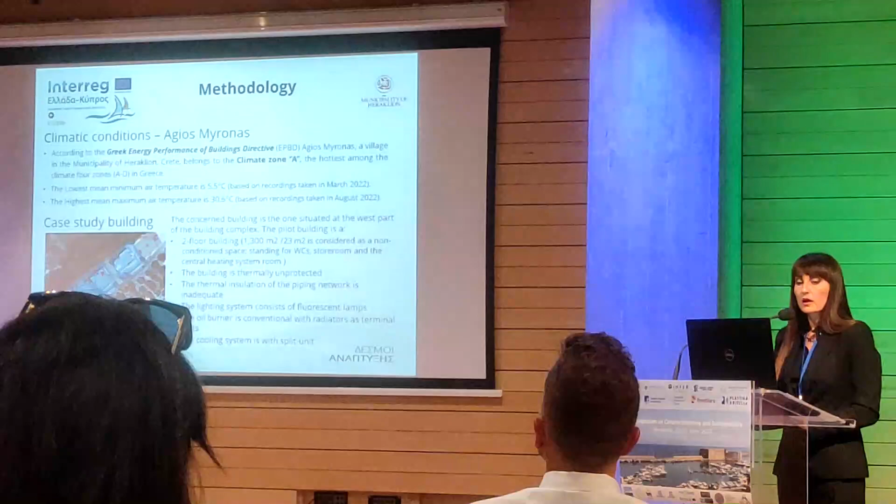According to the Greek Energy Performance of Buildings Directive, EPBD, Agios Myronas, a village in the municipality of Heraklion, Crete, belongs to climate zone A, which is the hottest among the four climate zones A to D in Greece. The lowest minimum air temperature is 5.5 degrees based on recordings in March 2022, and the highest mean maximum air temperature is 30.6 degrees based on recordings taken in August 2022.

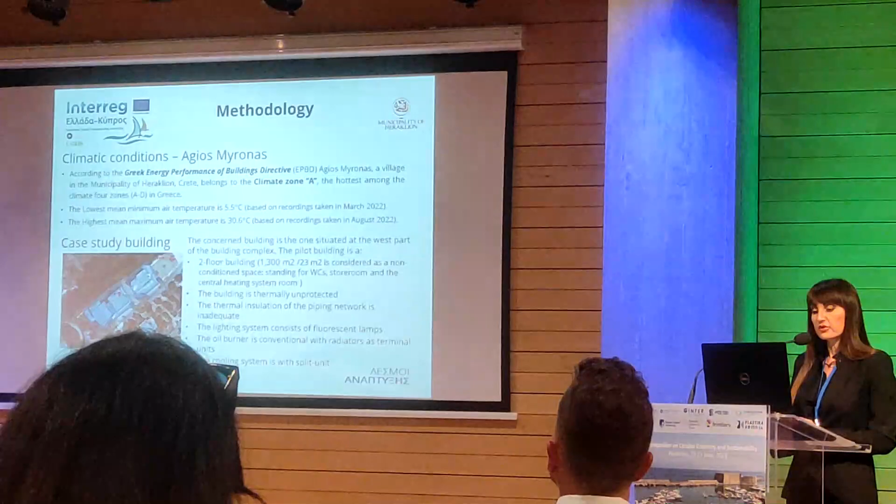The concerned building is the one situated, as you see here in the picture, at the west part of the building complex. The pilot building is a 2-floor building, 1,300 square meters, out of which 23 square meters is considered a non-conditioned space, which stands for washroom, storeroom, and central heating system room. The building is thermally unprotected. The thermal insulation of the piping network is inadequate. The lighting system consists of fluorescent lights. The oil burner is conventional with radiators as terminal units, and the cooling system is with split units.

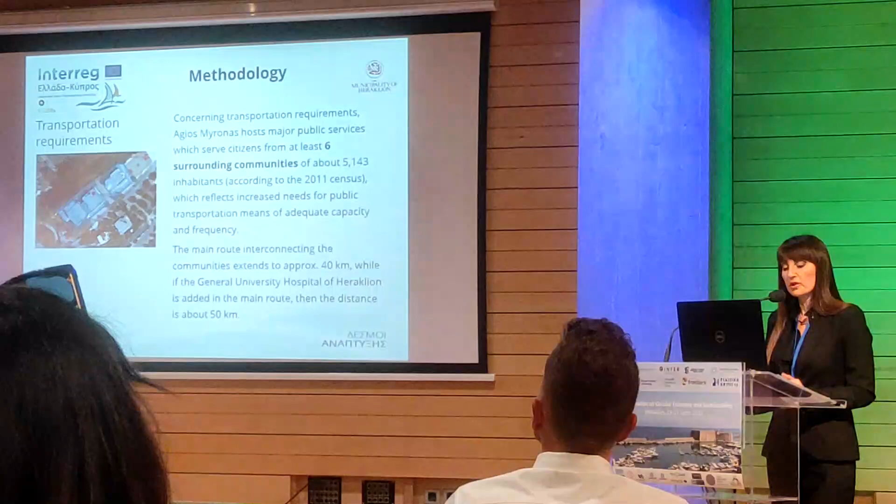Concerning transportation requirements, Agios Myronas hosts major public services which serve citizens from at least 6 surrounding communities of about 5,143 inhabitants, according to the 2011 census, which reflects increased needs for public transportation means of adequate capacity and frequency. The main route interconnecting the communities extends to approximately 40 kilometers. If the General University Hospital of Heraklion is added in the main route, then the distance is about 50 kilometers.

To assess the energy performance of the building, a thorough energy audit was performed, including energy rating using the National EPBD software, technical instructions of the Technical Chamber of Greece, KENAK, which employs the quasi-steady-state monthly time step calculation procedure according to ISO 13790. The building parameters were used as input conditions towards the calculation of energy consumption, and a twin building which meets the minimum energy performance requirements as per the Greek EPBD was used as a reference building to calculate the divergence and see the simulation results.

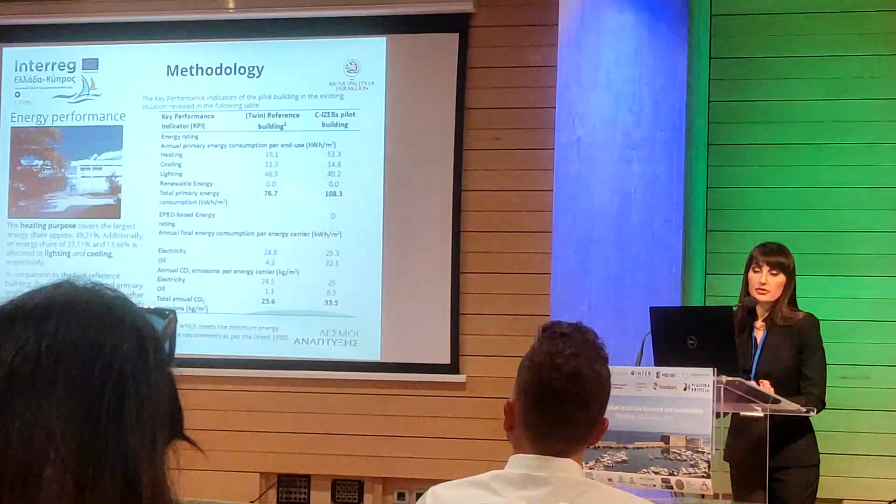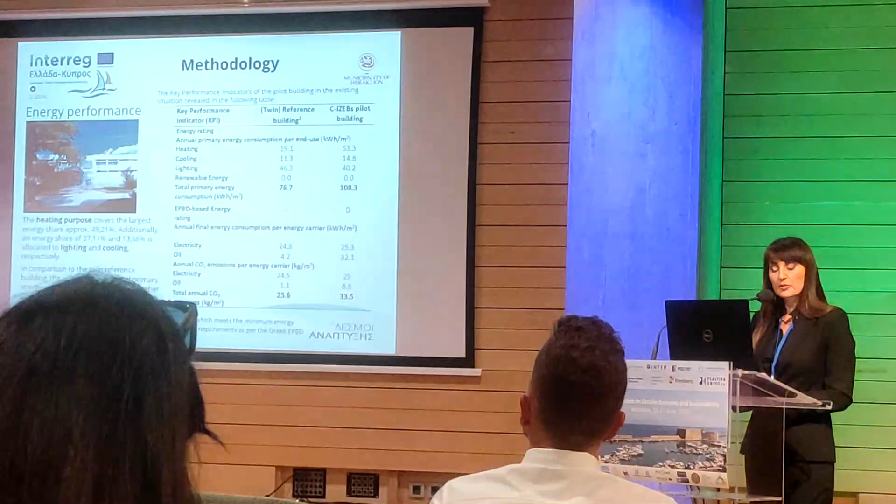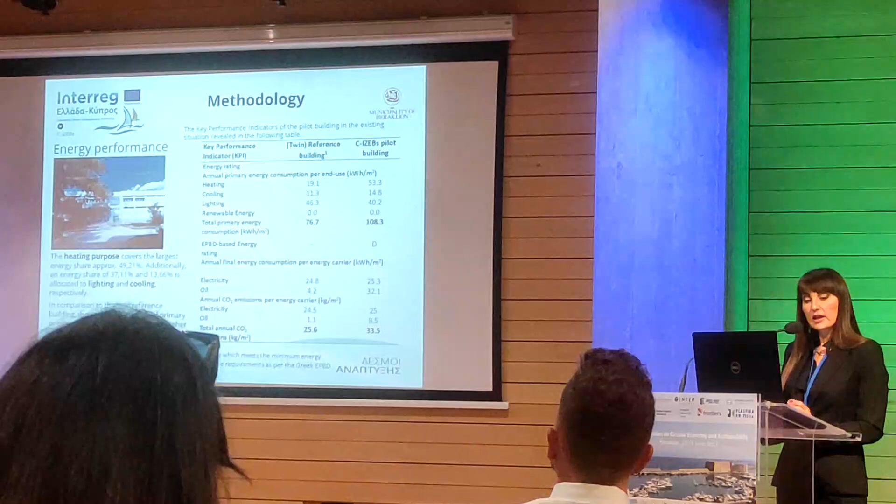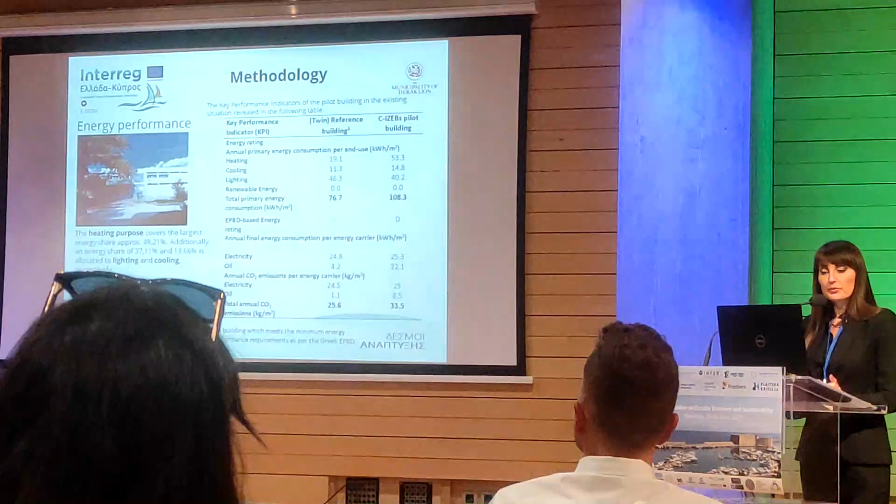Here we see the key performance indicators of the pilot building in the existing situation revealed at this table. And we see that the heating purpose covers the largest energy share. If we do the calculation, that entails 49.21%. Additionally, an energy share of 37.11% and 13.66% is allocated in lighting and cooling, respectively. In comparison to the twin reference building, the actual building's total primary energy consumption is about 41.2% higher than the former, admitting that a relatively high energy saving potential is possible.

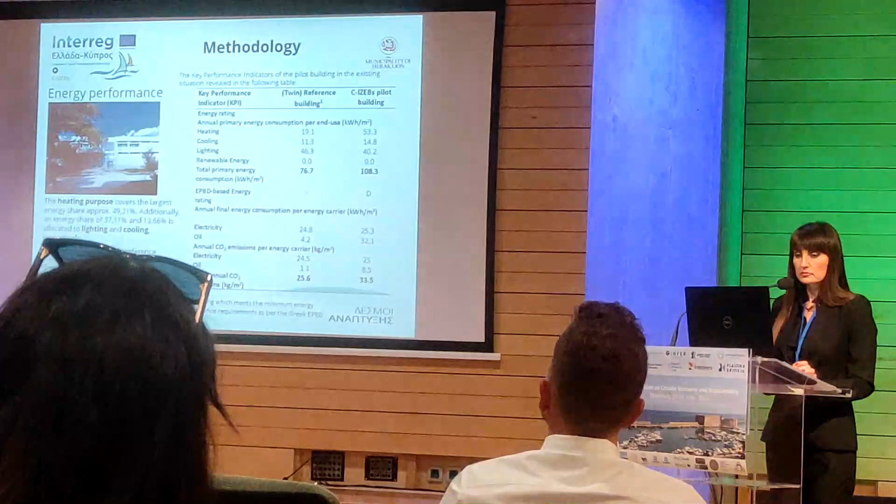The interventions done in the building fabric were in the roof, where graphite expanded polystyrene was used for insulation, and in the bearing structure and brick wall, where graphite EPS slabs were also used for insulation. On the roof we see a thermal transmittance of U value 0.387, and for the brick wall the achievable thermal transmittance was U value 0.369.

Energy interventions were also done in the windows, artificial lighting and heating system. The windows were replaced by double glazed and laminated windows with aluminum frame with 18 millimeter air gap with low-e membrane at the external glazing. The new thermal transmittance of the windows is U value 2.192.

According to the study, the existing fluorescent lamps were replaced with LED ones, which will ensure the lighting level of 300 lux required by the EPBD directive for school buildings. As far as the heating system goes, the conventional oil burner is replaced by a condensing oil burner with integrated weather compensation system with usage power of 150 kilowatt at operating temperatures of 80 degrees and 60 degrees respectively, and efficiency of 96.4%.